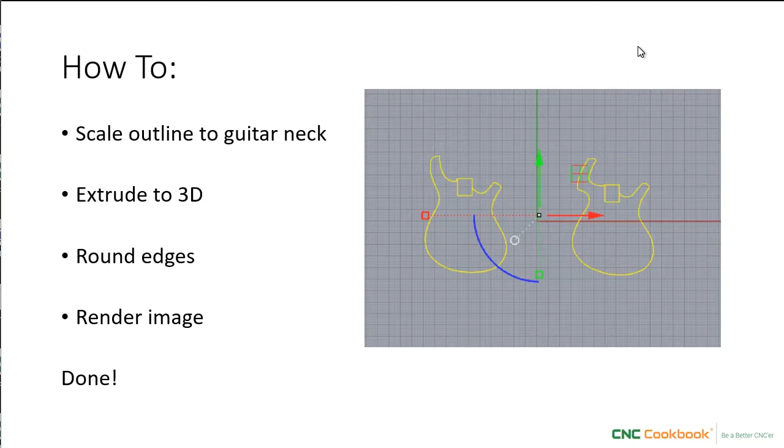Here's what we're going to get into in a little more detail. First, we need to take the outline that we took in the last video and scale it to fit our guitar neck's dimensions. Then we'll extrude that outline to create a 3D model. We'll round the edges a bit so they're not square. And then finally, we'll render the image so you can get an idea of what it might look like when it's finished. Sound good? Okay, let's dive in and get started.

Here we are in Rhino 3D, the CAD program that we use to capture the outlines, and I've chosen one of the simpler outlines to work from. Our first task here is we need to scale this neck pocket to be the size of guitar neck that we're going to use. Now, if you already have a neck, by all means measure that neck. I want to just build this guitar body though to standard dimensions.

So if you get onto Google and you search for the standard dimensions for the neck pocket, you'll find a site very quickly. This is Warmoth Custom Guitars, and what they're telling us is that Strat pockets are 2 3/16 and so are Tele pockets. So we're going to use those dimensions, and 2 3/16 works out to be 2.1875 inches. So I'm going to start by creating a little rectangle here, and its only purpose is to capture that dimension. So let's make it 2.1875 inches, and we'll just make it square.

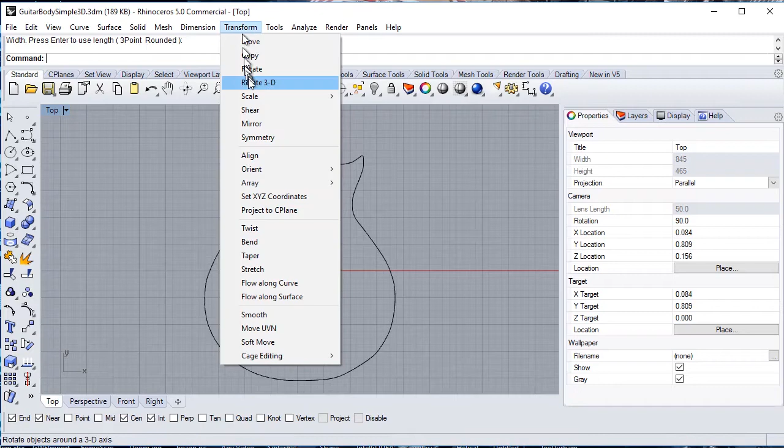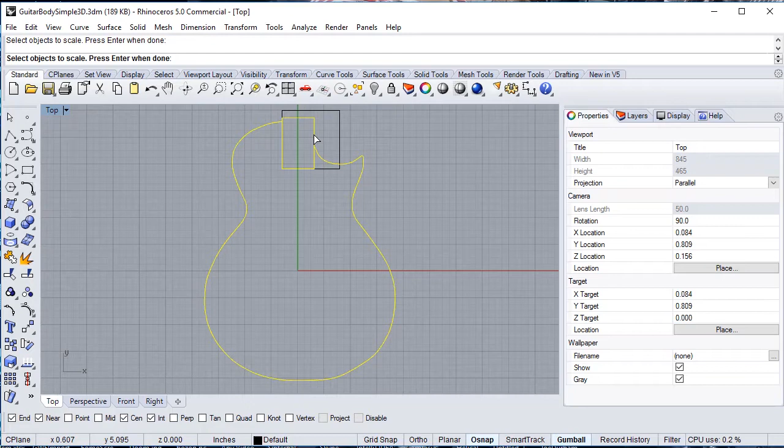Okay, so we want to scale this entire outline so that this pocket is now this wide. To do that, I'm going to use the scaling transform, and I only need to scale in 2 dimensions because I've just got an outline. It's not 3D yet. So I'll go to Scale 2D, select what objects I want to scale. I want the body outline and I want the neck pocket. And I held down the Shift key as I click these so that everything stays selected. And so I'm going to hit Enter because I'm done with that.

And now the origin point. Let's scale from here, first reference. So that's my original size to my second reference here. And boom, that's all there is to it. I've now got my body all scaled to the appropriate size. I'm going to just delete this neck pocket rectangle I used. And we're now at the right size. We're ready to go to the next step.

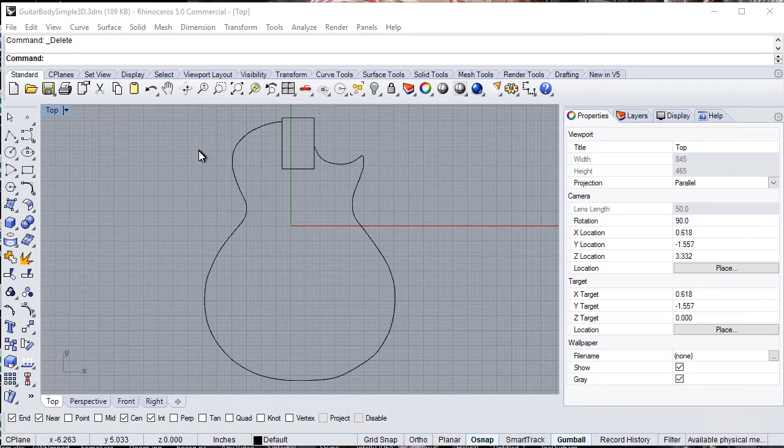Okay, now we need to clean up this outline just a little bit so we have a continuous outline. So I'm going to take the rectangle tool again. I'm going to click here on that corner and then that. Okay, now we're going to use that little rectangle we created to finish out the body outline properly. To do that, what I need to do is trim these shapes and then join them together. And so we'll start with a split.

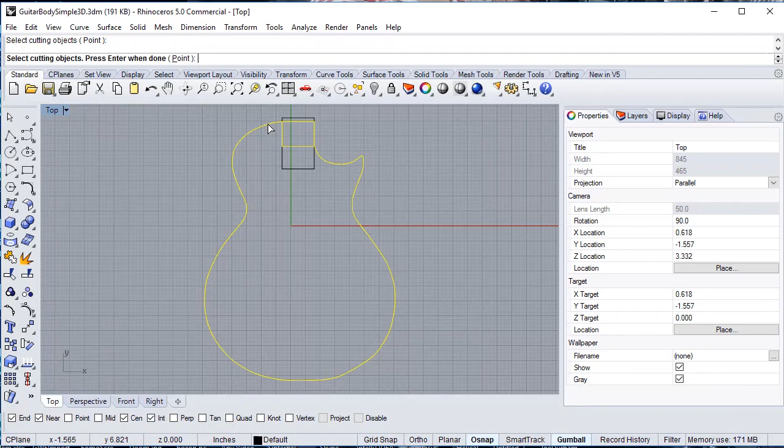It says what object do you want to split? I want to split our small rectangle here. Hit Enter. And I want to split it where the outline meets it. So I'll select that outline as the cutting object. And I hit Enter. And this bottom part goes away. Okay, and that leaves this top part. So I'm going to take these two and I'm going to join them together.

Okay, so now I have one outline there. That's the overall outline, and I still have a shape that's going to represent the neck pocket that we're going to cut down into that outline.

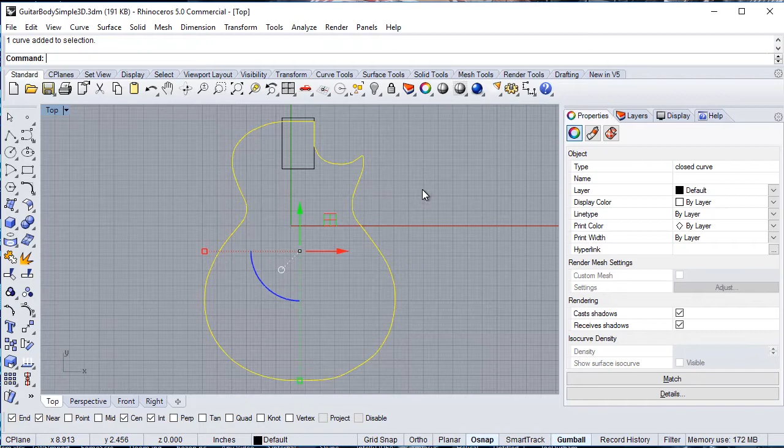Okay, so our next step is to extrude this to create some 3D volume to the shape. And so I go into Solid, Extrude Curve. I want to extrude it straight, and it wants to know what my extrusion distance is. Guitars like this, you can again Google to find the dimensions, but they're about 2 inches thick in the body.

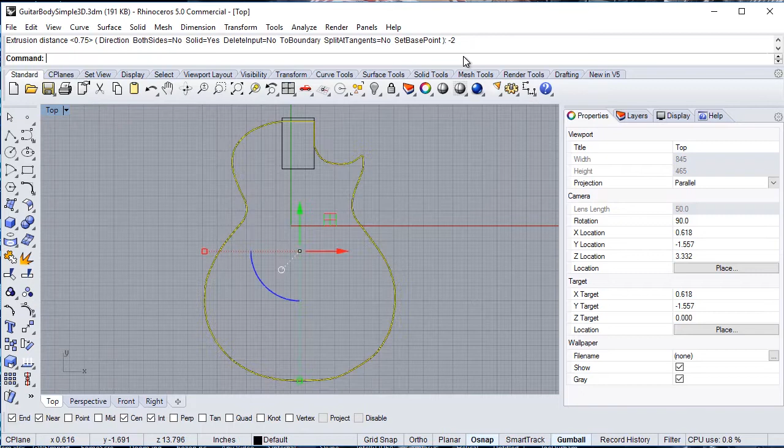So I'm going to go down to the outline at Z0, and create my extrusion. I want to make it a little easier to see what's going on, so I like the ghosted view for that. And now we have a nice view here of this thing. You can kind of see, let's do another ghosted view, what's going on with it.

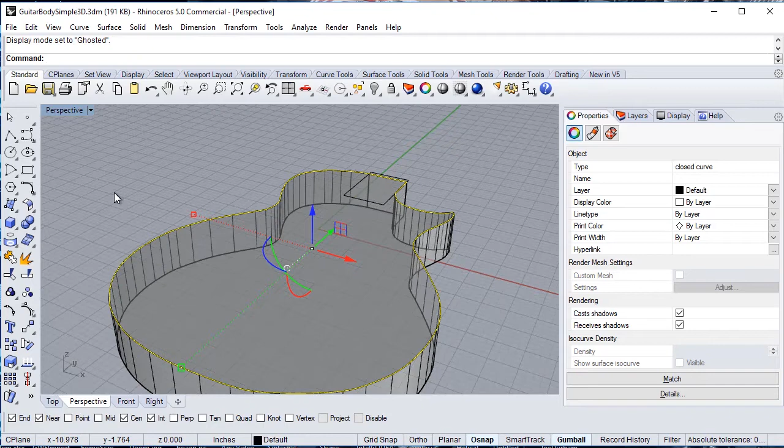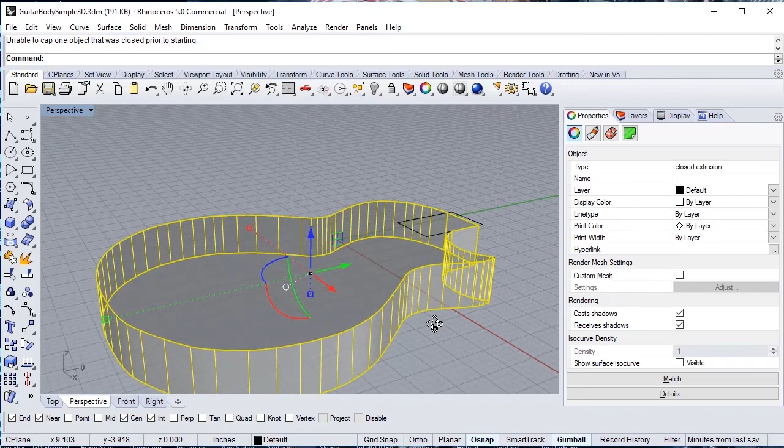And it doesn't look like we have a top. So I'm going to go ahead and do a cap planar holes option there. All right, let's just take a look at this and see what we think. Yeah, okay, so we have the basic shape created, and we're ready to go on to the next step with it.

So then the next thing we want to do here is cut out that neck pocket that the neck is going to go into. That's pretty easy to do. I'm going to create another shape here using our neck pocket's outline template, and I'm going to extrude that.

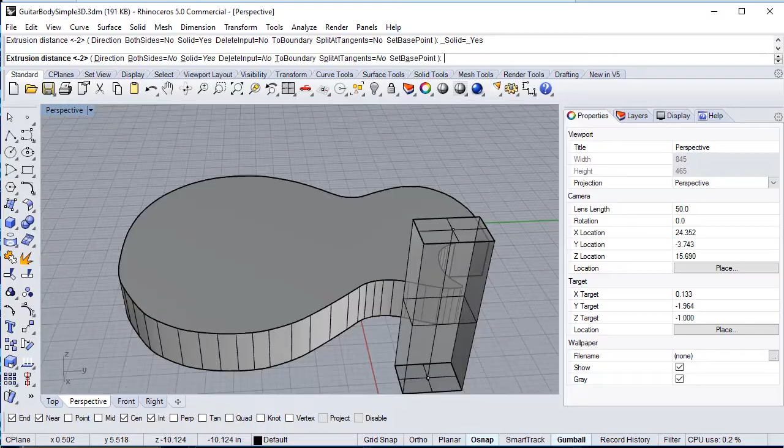As far as how deep it needs to be, again, if we go out and Google, we see they're 5/8 of an inch deep, these neck pockets. So I want to do the exact same thing here, go 5/8 deep. So for the extrusion distance, I'm just going to put in minus 0.625 for 5/8. And boom, now I have my little shape.

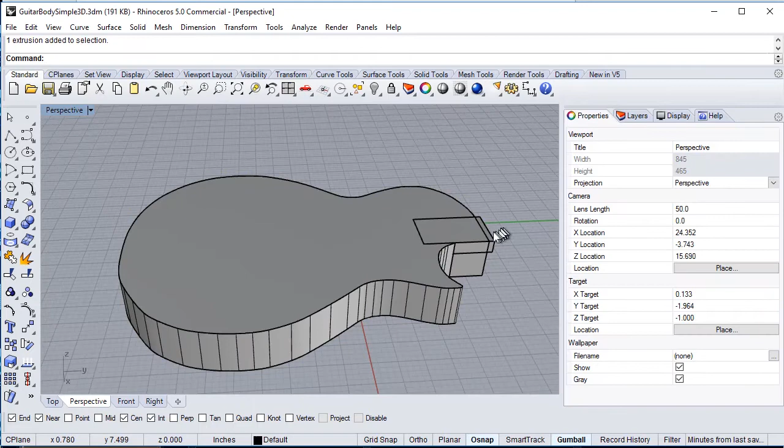Let's make it a different color just so you can see better what's going on here. Let's get a little closer. I'm going to put that one in the red layer. Yeah, now we can see a little bit better what's going on.

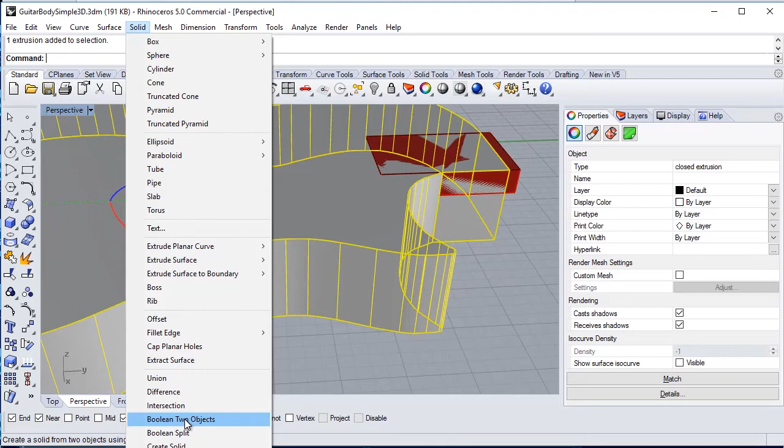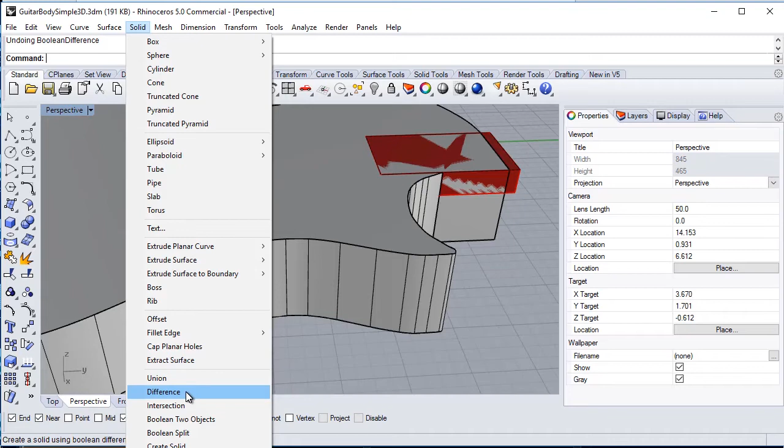And what I'm going to do is take the big guitar body slab and do a Boolean operation. So what I want to do there is this guy. Let's back up here. So the way we subtract this out is we do what's called a Boolean difference.

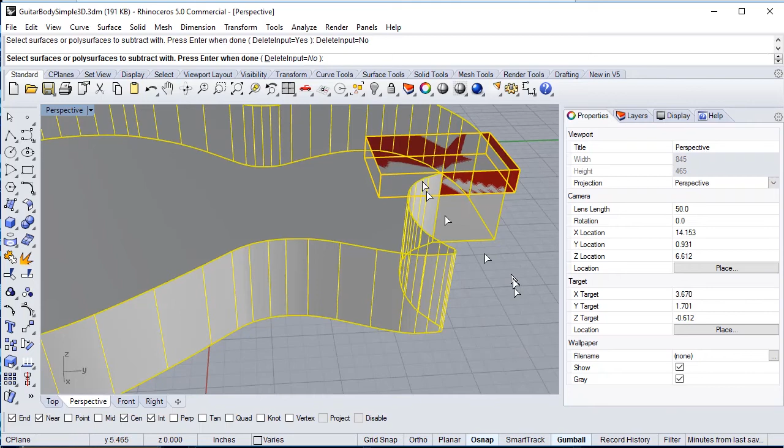I select Boolean difference, and it's literally subtracting one solid object from another. So what we're going to subtract from is the body. I hit enter, and what I want to subtract with is our little template guy I made here. I don't want to delete him, I might need him for something later, so let's not delete him. I hit enter, and you can see this now looks a lot cleaner.

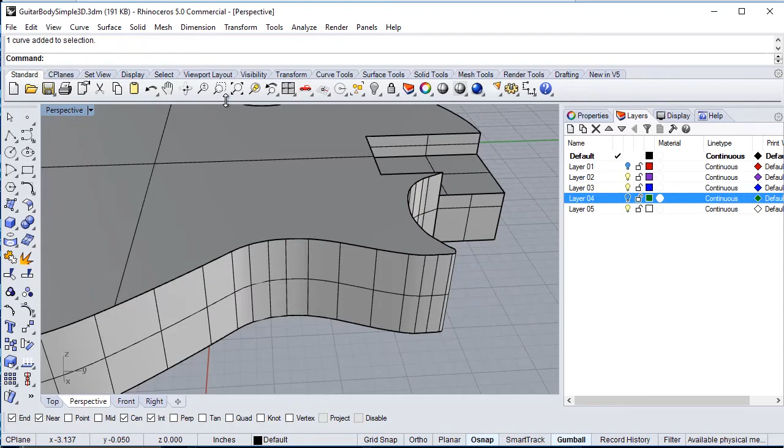So this guy's been subtracted out. And we can, if we want to make that more obvious, hide him, and clean up a couple of these guys. We'll just delete them, we don't need them, get them out of our way. I might just keep the outline of the body, and I like to do that by putting them into what I call a construction layer. I always use layer 4 for that, and then I can just hide that layer and not have to see it. Okay, so now we have a pretty good guitar body.

We've got a pocket for the neck to be bolted into, we've got the body itself. The last thing we need to do, though, is clean up all these sharp edges. Guitars don't have sharp edges like that. And yeah, you could go through and CNC it so it comes out this way and just sand the sharp edges off.

But we've also got the ability to do that using the Rhino CAD software, so the CNC will help us by cutting most of that round shape for us. Again, this is really up to you how you want to do it. You could also take this into your CNC, and particularly since you have the outline available, run a corner rounding tool around the edge to cut that radius. But if you want to use a ball nose to do it as part of your 3D machining, it's better to go ahead and create the radius here that you'll work from.

So I'm going to go ahead and save this so I have it in this shape, depending on what I want to do when I get ready to cut it. And now let me get in there and round off those edges.

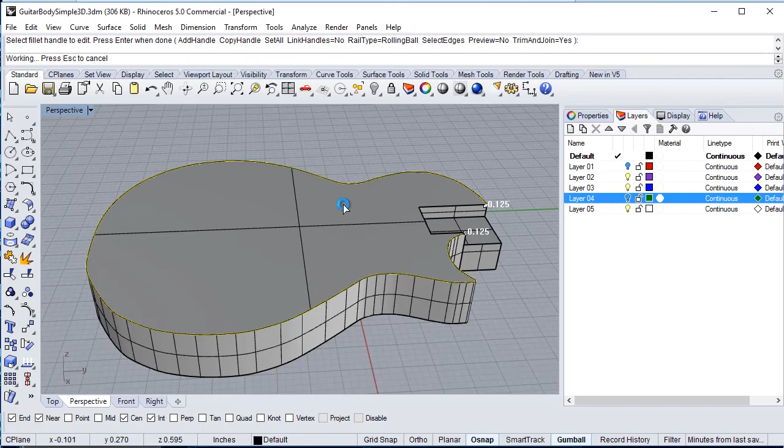To put a radius on the edge, I use a command called fillet edge. It's simple: I select the edge I want to fillet. This is the perfect edge for us. You need to set the radius you want — I've got it set to 1/8 of an inch, but if you want a bigger rounded edge, we could go 0.15 inch. With the edges selected, we hit enter. It wants fillet handles, but I'll just leave those be. It crunches on it a while, and now we have a nice rounded edge.

We can flip our guitar over like so, and fillet that edge too. Fillet edge, select the edge, and let's get our fillet done. Now we've got it all nicely taken care of.

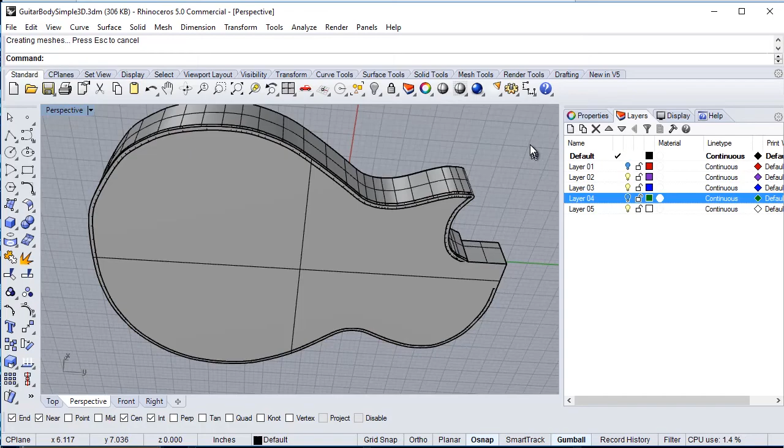So either way you want to do it, you can use the corner rounding tool, or go ahead with this approach and use your 3D toolpath to round that fillet. With a nice tight step over, you'll still probably need to sand a little bit, but it'll be less sanding. The more you can get the machine to do for you, the better, as far as I'm concerned.

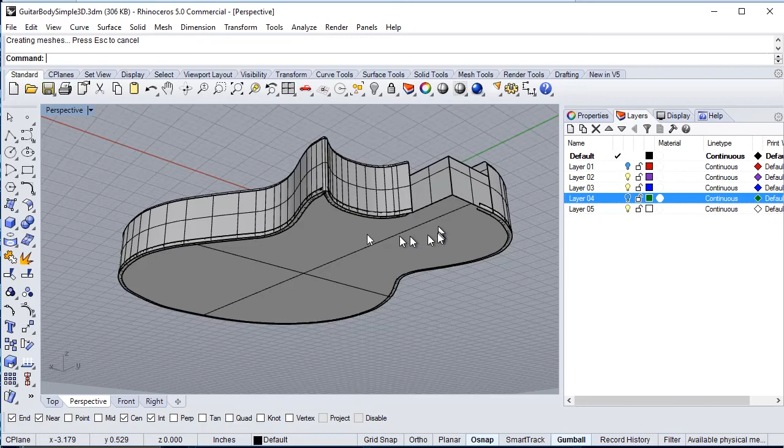If there are other edges you want to put a little fillet on, that's entirely doable. You might want to carry the fillet around the neck here or not — it really depends how your neck is going to fit — or maybe just out this far. You might want to fillet that sharp corner. But you can always clean that stuff up by hand, sanding it as well.

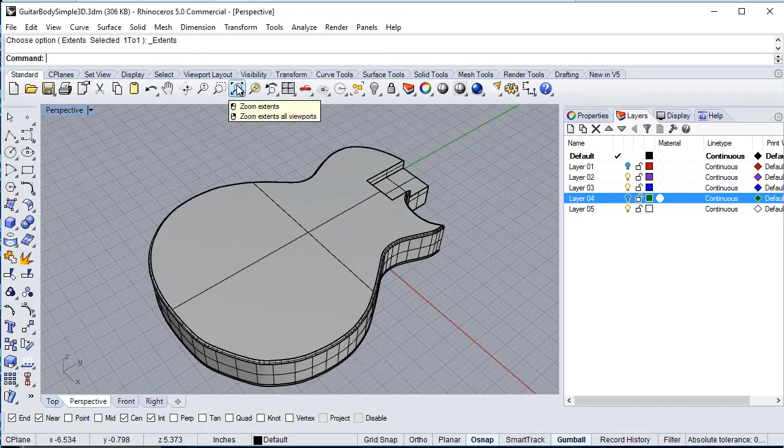Now, obviously we're not done here. There are all kinds of pockets for pickups and controls and bridges and stuff we've got to put in. We need holes back here to mount the neck, and so on and so forth. But for this video, I just wanted to show the basics of how to start getting your shape the way you want it. And so that's what we got.

The last thing I promised we'd do in this video is render this 3D model so we can see a bit more what it might look like. I'm going to switch the view over to a rendered mode. To really make this interesting, we need to go to our layers and assign a material, since the guitar body is all in the default layer. So let's assign a material to that.

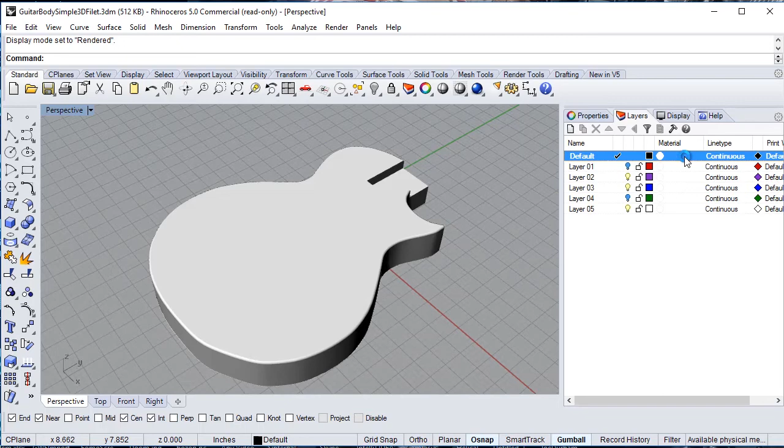We bring up the material view, click new, and it takes me to see all the materials I have available. There are different subdirectories with different types of material. We're making a wooden guitar body, so I've got these different options, and I can see a bit of a sketch of what they'll look like — beech, Douglas fir. Let's maybe make this guy out of some walnut; it'll be a darker wood. So we entered that as our material, click OK, and there we have it — a guitar body with a walnut finish.

It's kind of cool to check out the different finishes. You can get these materials and customize them in various ways. I can come in here and go, well, let's put a very gloss finish on it — let's see what that does for us. It makes it kind of shinier.

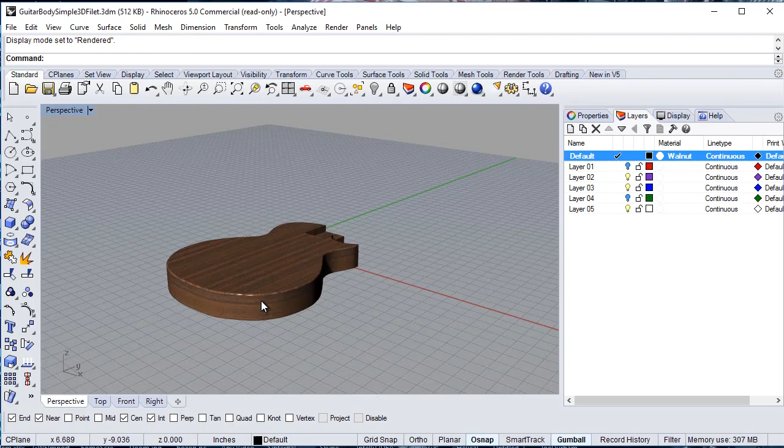You could also be doing a two-layer guitar — it's really common to have, say, a figured maple top attached to a mahogany back. You can model all of that in your CAD software and get a sense of how the guitar is going to look when it's finished. It's kind of fun.